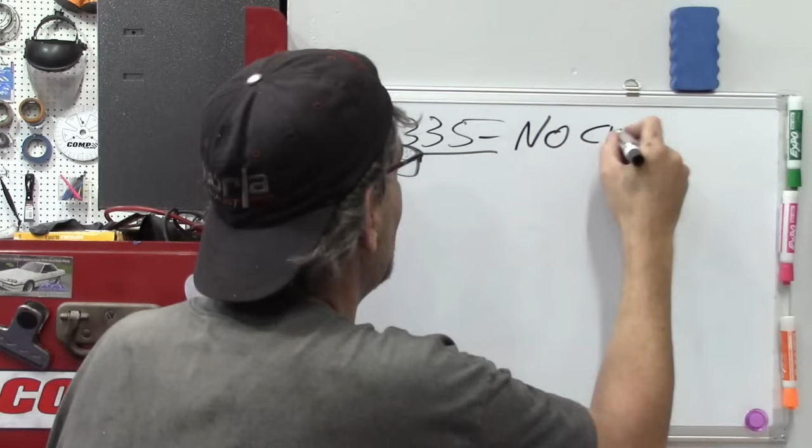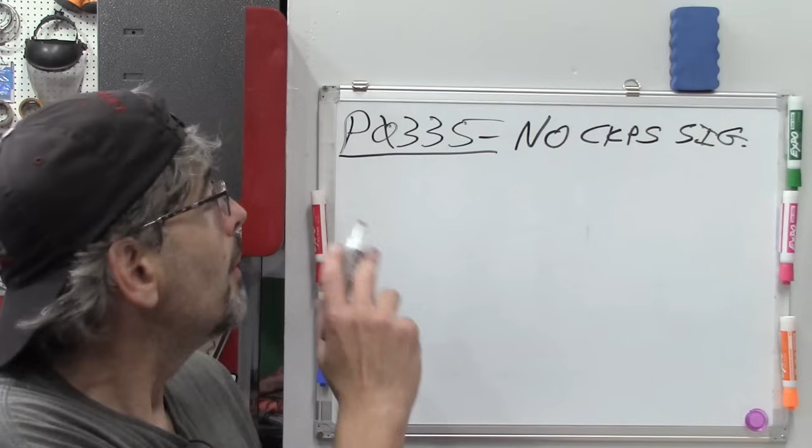All right, so the original code the guy had, which on the GM car is typically going to be a no crankshaft position sensor signal code. So essentially, for a certain period of time, and I don't remember how long that time is, it's somewhere along the lines like 3 or 5 seconds, if no crankshaft signal is detected with the engine turning, and of course it knows the engine's turning from the camshaft position sensor, but if it doesn't detect a crankshaft position signal at all for a certain amount of time, PCM will throw this P0335 code.

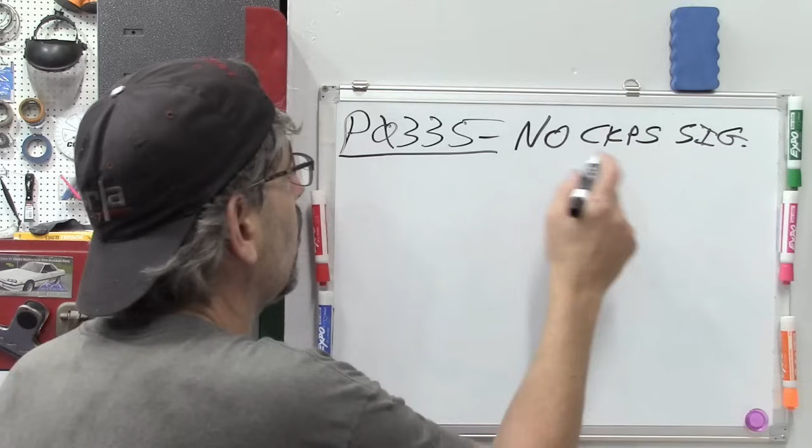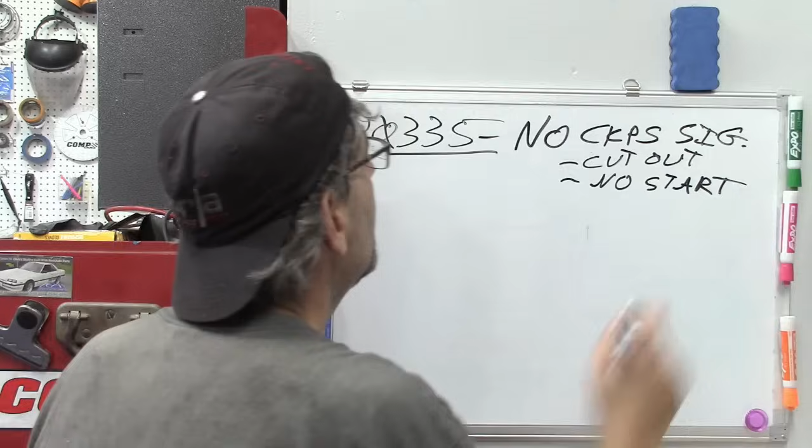Of course, upon getting that P0335 code, most people are going to just replace the crankshaft position sensor. That is what this guy did. And then after replacing the crankshaft position sensor, the vehicle no longer has the symptoms as before, which is it would cut out, it would sometimes no start, and also run pretty rough.

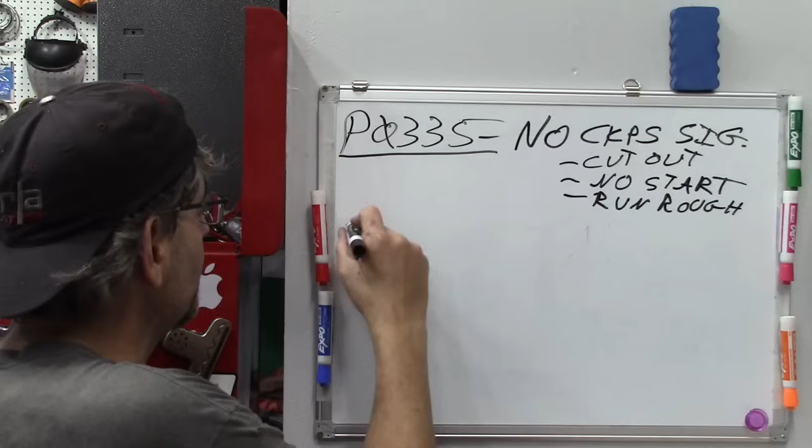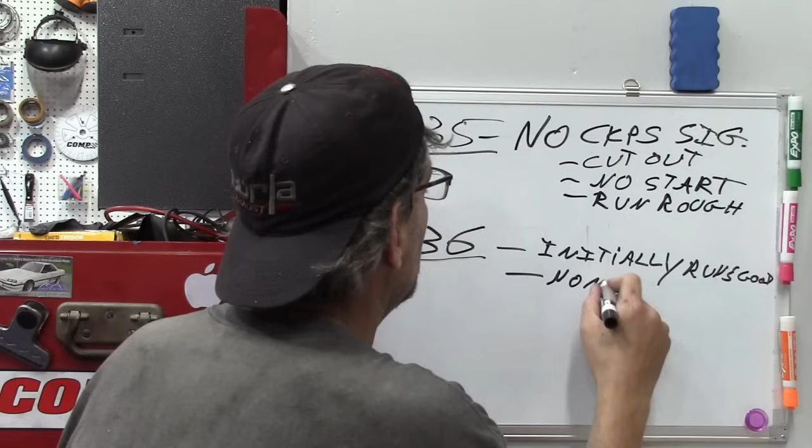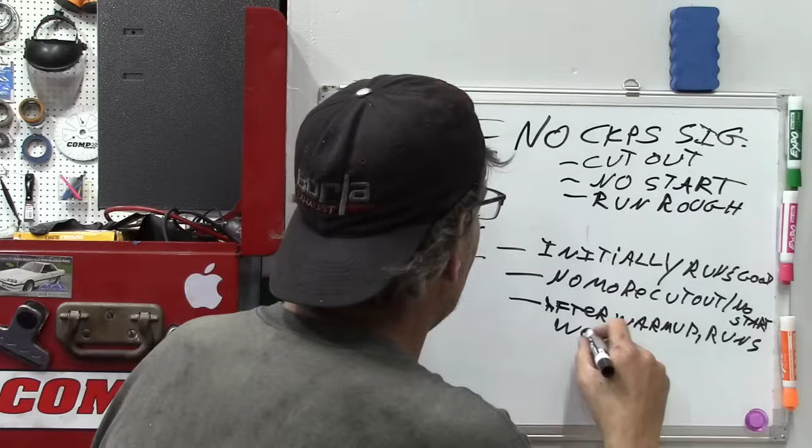So he replaces it. Now, after replacement, he develops the P0336. With this, he has a new set of symptoms. One of them is it initially runs good. Another one is no more cut out or no start. So the symptoms change a bit. It runs at least a little bit more consistently. Then the other thing is after warm-up, it runs worse than ever. So that's what we're dealing with on this.

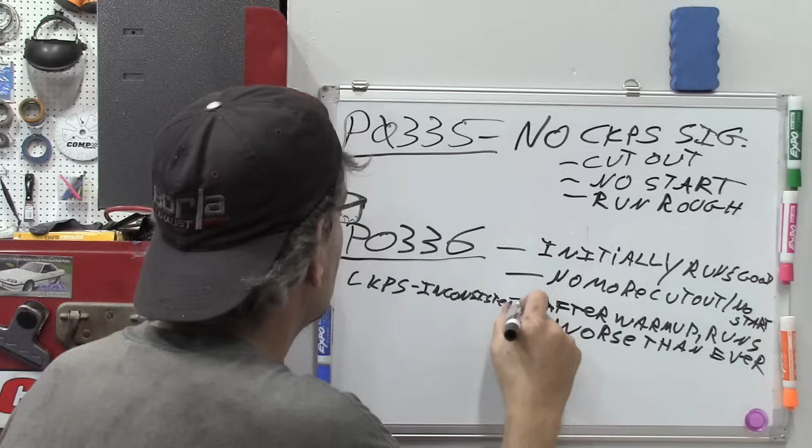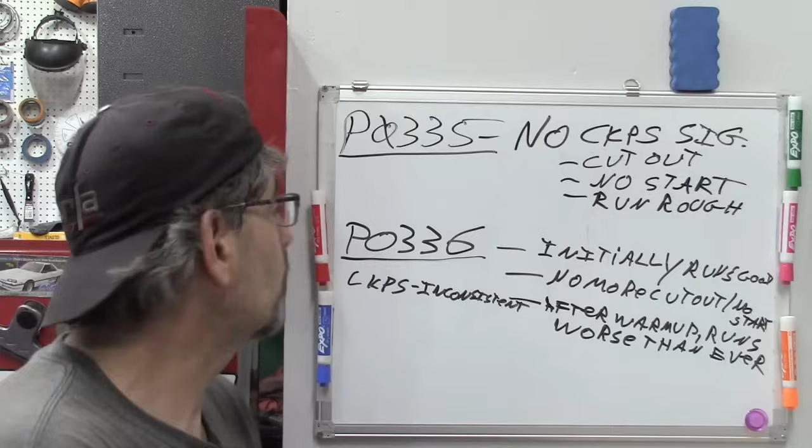Now, the P0336 code is a little bit different in that this is essentially a crankshaft position sensor inconsistent signal. So in this one, if over a certain period of time there is an in and out or intermittent signal from the crankshaft position sensor, that's where you'll get your P0336.

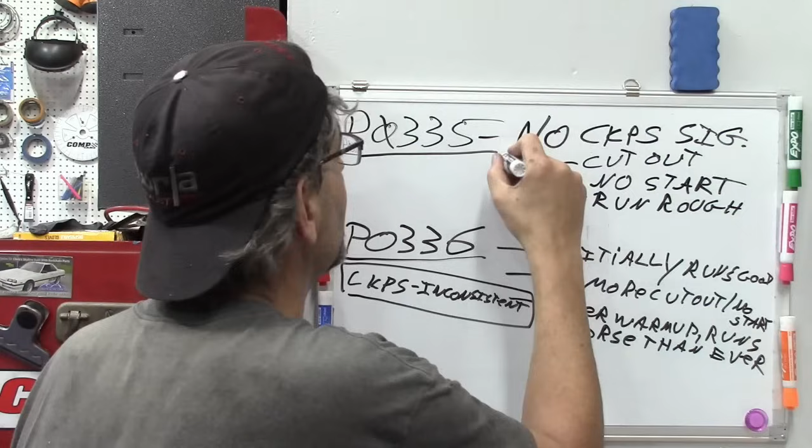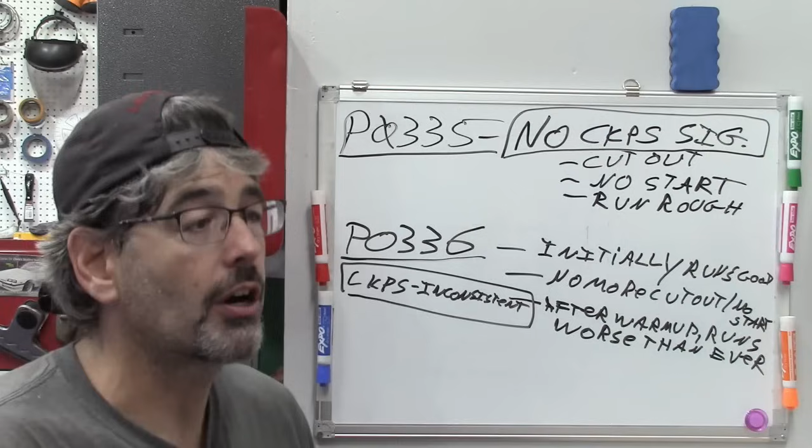So this is giving me a direction because I can put a story together which I believe is going to be the most likely explanation, and that is going to be some kind of loose wiring, loose connection, or something with the crankshaft position sensor itself, because initially he has no signal from the crankshaft position sensor, but after replacing it, he gets an intermittent or inconsistent signal, according to at least the criteria that sets this code.

And what that's telling me is most likely he probably didn't need the crankshaft sensor originally. There was some kind of wiring or short or some issue there that when he moved the wiring around, replacing the crankshaft position sensor, he created a different positioning, and now there's just an inconsistent code. Of course, I don't know this for sure. This is just the hypothesis that I'm going on, but I want to have some direction where I'm not just randomly changing parts, and I have a good idea of where I want to start.

One of the things that's a little bit annoying about this type of vehicle, and the same thing happened with my Trans Am, we have the crankshaft position sensor located behind the starter.

So I have to remove the starter to get to the crankshaft position sensor. As you know, I am not going to get under a vehicle and remove a starter from a vehicle unless I absolutely have to. The way I would do this, as you know, is I would go to the PCM and I would read the signals from the PCM.

The problem is, given this story, most likely the issue is going to be at the connection near the crankshaft position sensor itself. So I know that it is going to be a waste of time, most likely, for me to go to the PCM to read my data. I want to go directly to the area where I'm likely to visually find a problem, which is going to be at the sensor itself.

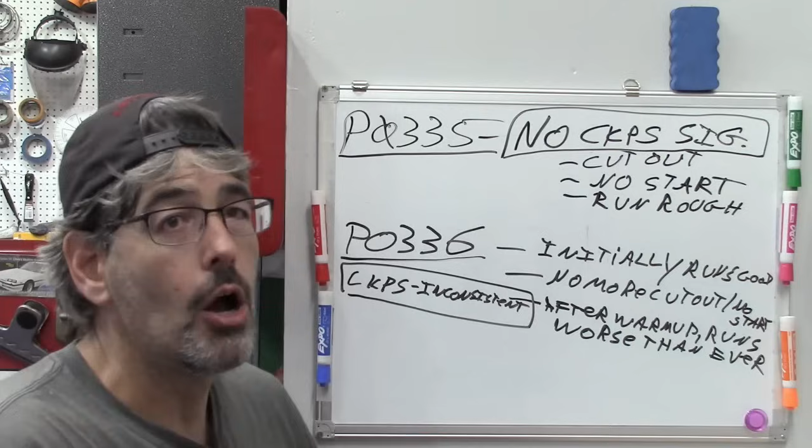It is going to be justified in this case for me to remove a starter, whereas typically that would be a really big time-consuming waste, because I have easier ways of reading the data off of that crankshaft position sensor. So I know where I'm going to go, I know what I'm looking for, and probably I'm wrong about this, but we have a direction without just firing the parts cannon. That's the idea. By the way, how well did replacing the crankshaft position sensor work anyway, for this guy? So that's the direction we're going to go.

I know Scotty's fans are all wondering, man, this guy sucks. He's been talking for 15 minutes and we haven't even moved a wrench yet. Yeah, exactly. Move a wrench on what? As a matter of fact, most likely I am going to fix this vehicle without even using a wrench at all. So that is how I do things, and that is the way we are going to do it right now.

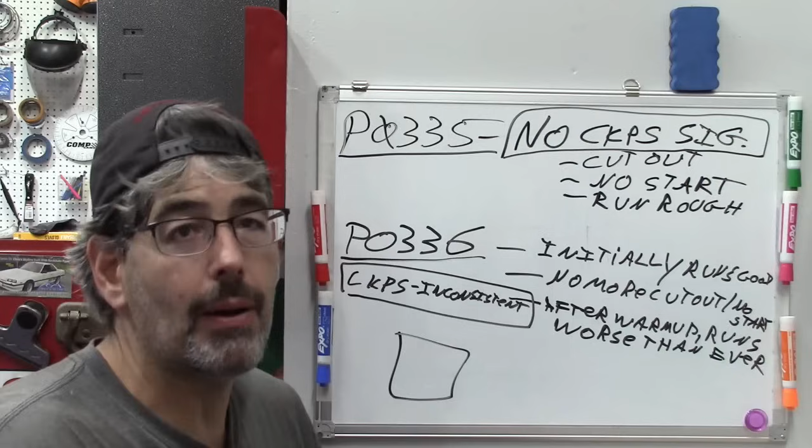Oh, one other advantage I have, and that is that I believe I'm going to be able to do this without a wiring diagram, because, as I mentioned before, we did crankshaft position sensor on my Trans Am, and while I'm not totally 100% sure of this, we do remember that the input wiring, the, what's the word I'm looking for, the reference wiring is going to be green.

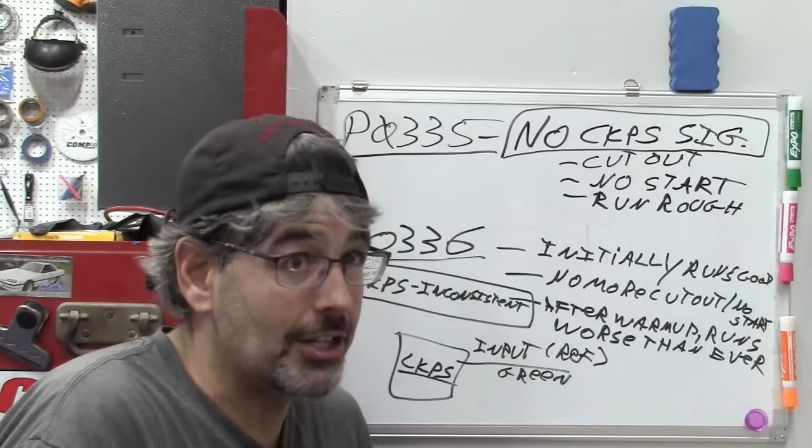We remember that from the video on the diagnosis and understanding of crankshaft and camshaft position sensors, because it really caught me off guard that the green wire, which of course you would expect would be a ground, was indeed, when we looked at the wiring diagram, the ignition positive, and we validated that also with the voltmeter. So I am very positive we're going to have the green wire. I don't remember what the other wires were. I remember there being a yellow one, I think, for the signal.

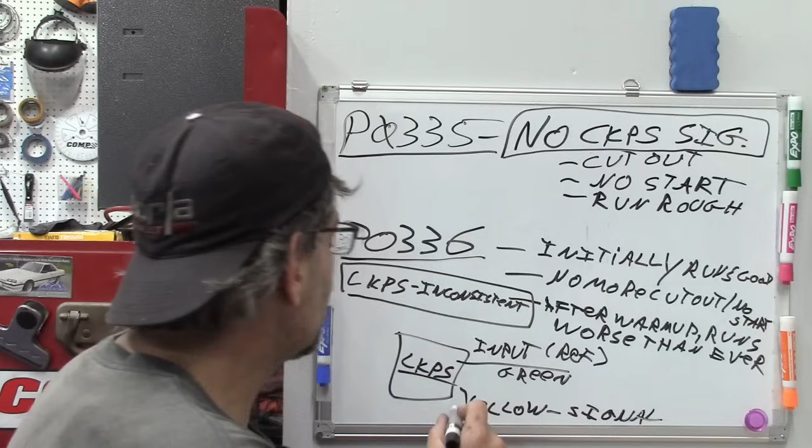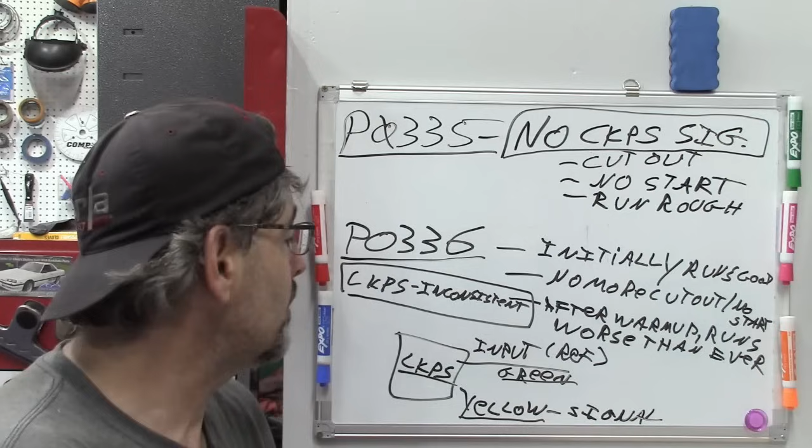So as long as I've got any two of these, then I of course know that the other one is going to be the ref low, and we'll be able to figure this out anyway. But the nice thing about this is, now that I have some background knowledge because I did my homework earlier, I won't even need to pull up a wiring diagram. Really, just knowing the green wire is going to be the reference signal is going to be more than enough for me to figure out the system. So let's get started on that.

Also wanted to show you the codes on the scan tool. A lot of times I forget to do that. All right, well actually we got a new one now. We got a random misfire code. Earlier we just got the P0336. And as I mentioned, we were trying to do the crankshaft position sensor relearn, but we're unable to do it, I believe because the codes kept popping up. It kept giving this out of range error, meaning that it was detecting something out of range with crankshaft position sensor, and it just refused to do the test.

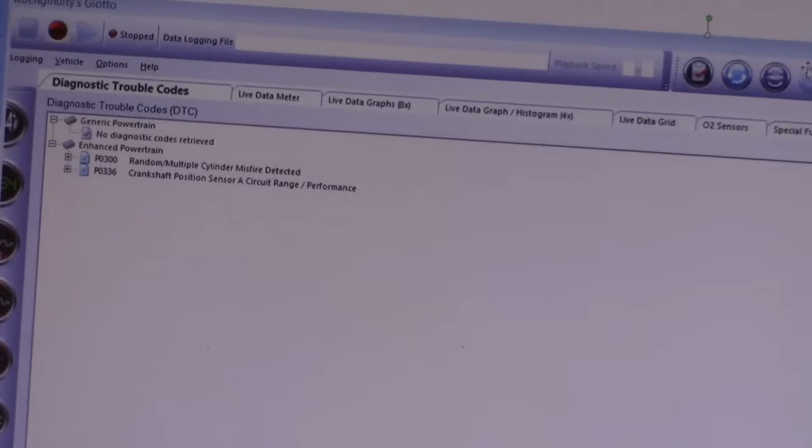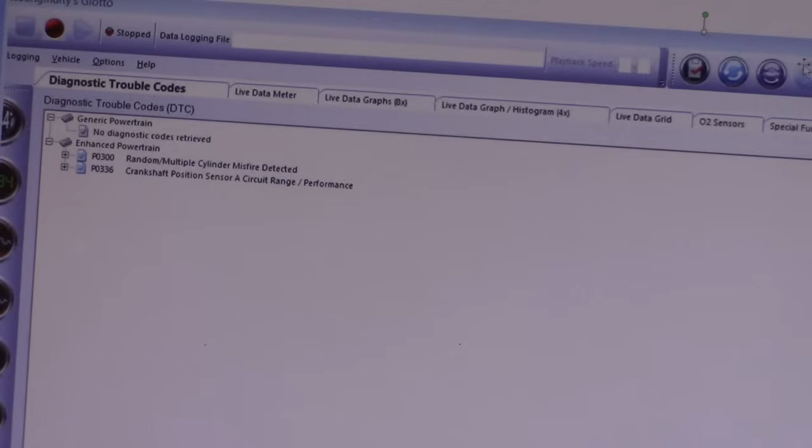Again, when we warm up the engine, we start having that phenomenon where it will start to run bad. Although it is still running good right now, but I'll get in there and rev it up for you a little bit, see if you can hear through the microphone the rough idling and hesitation. But also the fact with it warming up, that would also be another variable typically, and that is we're thinking, well, wait a minute, it runs really good when it's cold, but then once it warms up, it runs bad. Is that a closed loop phenomenon, or is that a temperature phenomenon?

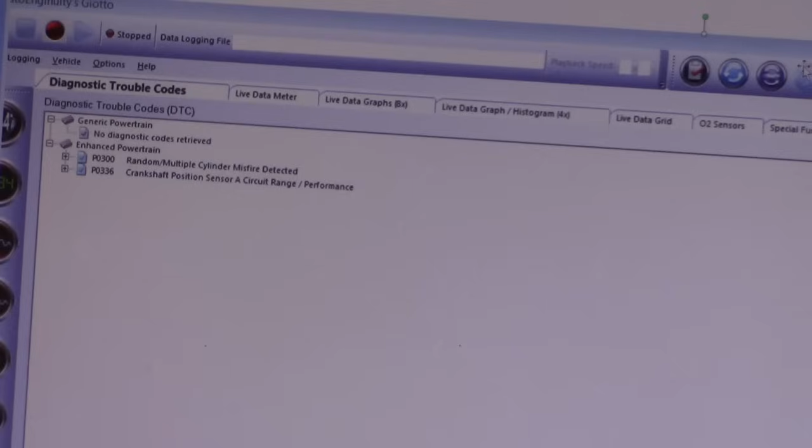And again, that's where that P0336 code originally comes in, because we've never pulled that code up yet. And that is telling me that there is variability. What are the variables for intermittent problems? Temperature is one of them, along with vibration and moisture and load and accessories, things like that. But I believe this is going to be more of a temperature phenomenon than a closed loop.

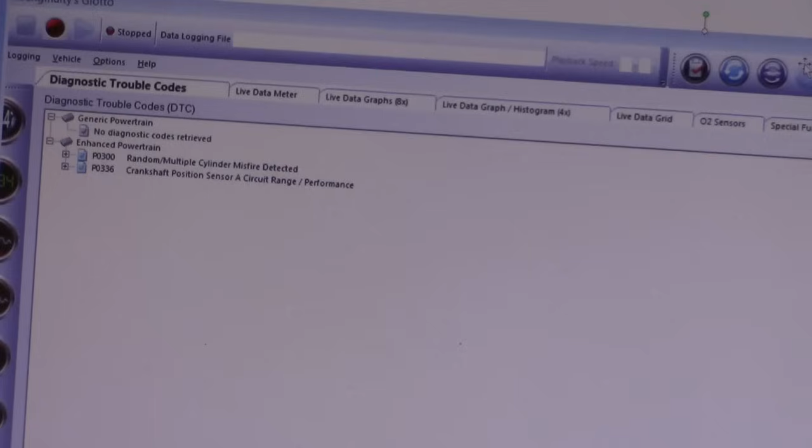Had we not seen the P0335 before the change of the sensor, that would have taken me in a totally different direction, and I would have had to start from square one. But this is telling me that this is going to be an inconsistent wiring connection issue or something. So I hope you see why that's important. You guys who followed the last series along know where I'm probably going with this.

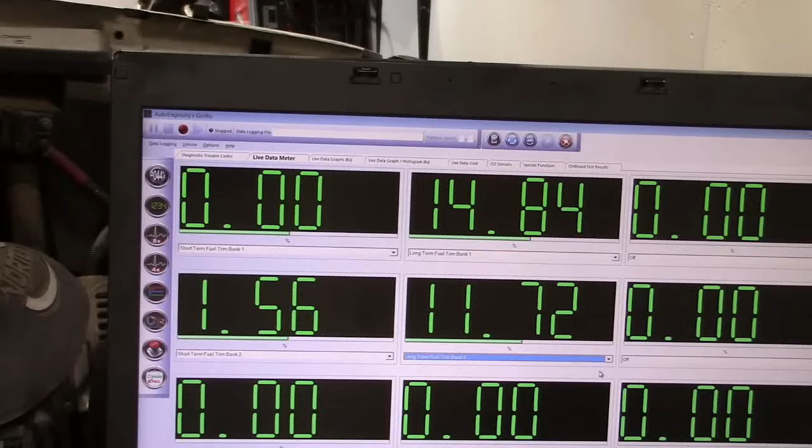I'm going to pull up some fuel trims here. And that truck I was working on last time, that Ford, that would not respond to anything on long-term fuel trim. I come to find out the truck's name is Big Red from the owner. Reported now a little bit high. Would like to see how that responds with throttle, but as you can see, I am able to read them, and this is drive-by-wire here, so I want to create some kind of variable to change the fuel trim. The only reason I'm doing this is because this is a little different than what I initially saw.

As we can see, the engine is warmed up. Engine is still running really good. Actually, now it's starting to run rough. Yeah, now we got it. It's starting to run rough. I was actually going to try the crankshaft position sensor learn because it was running so good. Let me get engine speed up here. Yeah, it's definitely running bad when I hit the gas now. It's idling good, but...

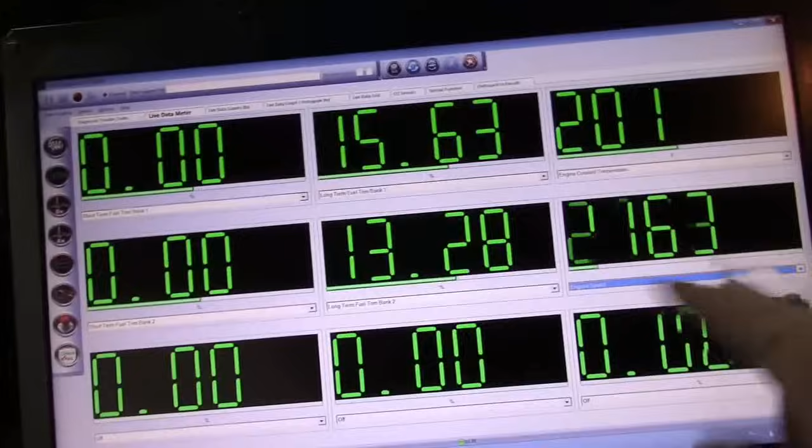And holding the throttle still, you can see how jumpy... Whoa, we lost RPM there for a second. Totally lost it. Yeah, we're definitely on the right track here. Oh, it just backfired now. So, because it was running so good, I was going to see if it would do the relearn, but we need to fix this vehicle first before we do it. It will not do the relearn when it's jumping.

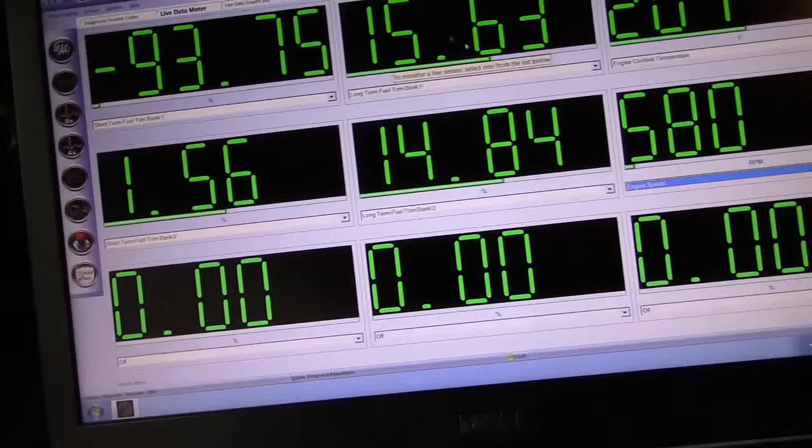Look at that right there. 9,400 RPM. It wouldn't even go that high. And we're still at idle. I didn't even touch the throttle. There is definitely some inconsistency here. So we are absolutely on the right track. All right, let's clear out of that and let's get under the truck.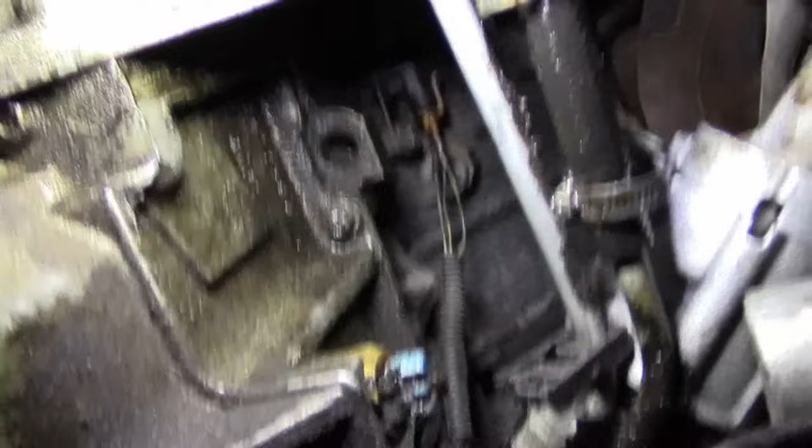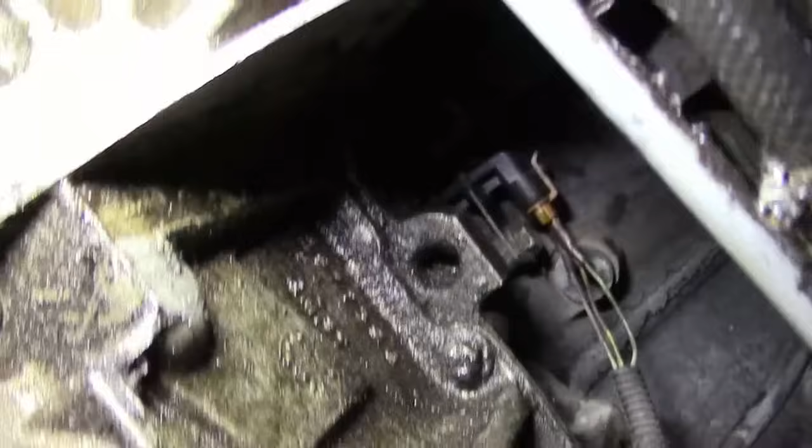You guys know I love these under-car shots. I am not even sure how to position the camera here. I want to have it stable so I don't make you guys seasick. You can see we've got another couple of variables here. This vehicle has a pretty significant oil leak, and that could be a variable if that is dripping onto the sensor. We can see it is not. But another reason that I am down here, I forgot to mention earlier, is another variable would be the reluctor wheel having some kind of an issue. If we've got loose or missing teeth on a reluctor wheel, or an air gap issue between the sensor magnet and the reluctor wheel, some kind of debris.

So basically, putting everything together, there's like a 95% chance that the issue is going to be in the field of view of this camera. Your only other variables are going to be something along this wiring harness, which is a possibility. We have another video where one ran along an exhaust manifold and melted. That was just a few years ago. And the other possibility would be a PCM issue. So those are the only two variables that wouldn't be in this field of view. And based on the story we're putting together and the evidence we have, it is just overwhelming. It's going to be around here. So let me try to reposition the camera.

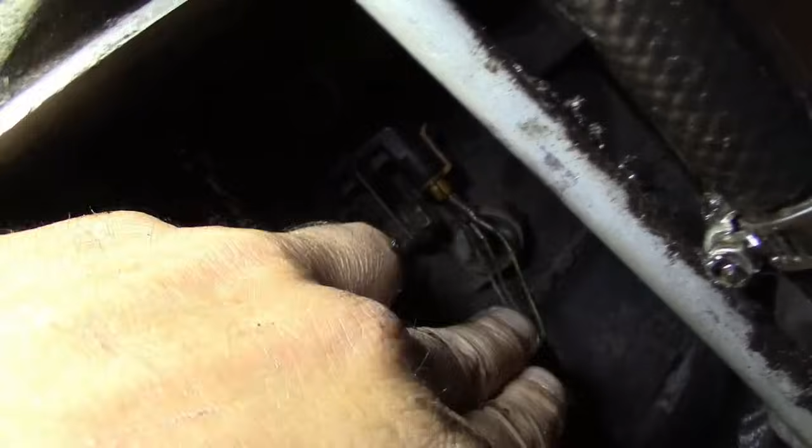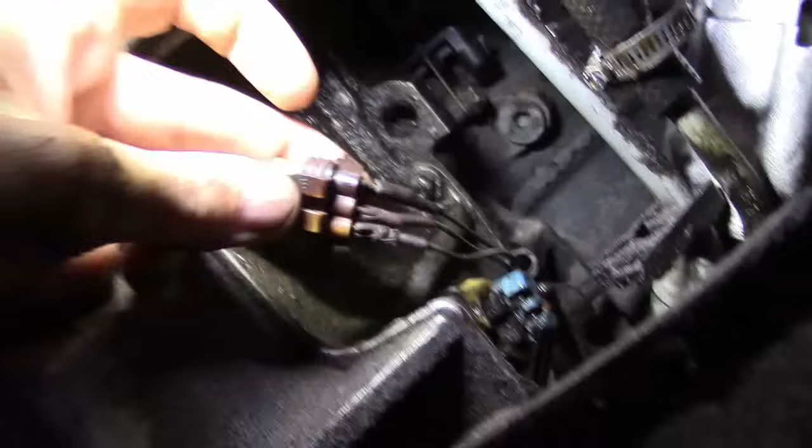But here's one thing. That right there is a green wire. So that I know is going to be my reference. And what I want to do is get some back probes in there. And actually, before that, let's just inspect this, because it looks like this wiring has been adjusted, because these heat shrink seals definitely look aftermarket to me. So it does look like there may be something there to look at. Let's actually just take a look there. Oh, well, there you go, right there. See this?

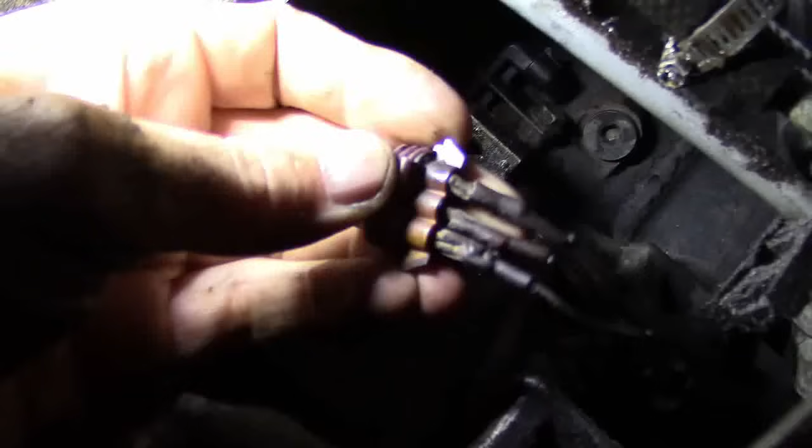This wire here, we've got a green, a yellow, and this wire, I'm not even sure what color this is. But I'm guessing that's going to be the ref low. And that wire is wiggling in and out of its socket. Yeah, that definitely is. The other ones are pretty stable. But that's going to be our issue right there. So how easy was that? Now, of course, I want to confirm this and be able to reproduce this. So the first thing I need to do is get this camera still.

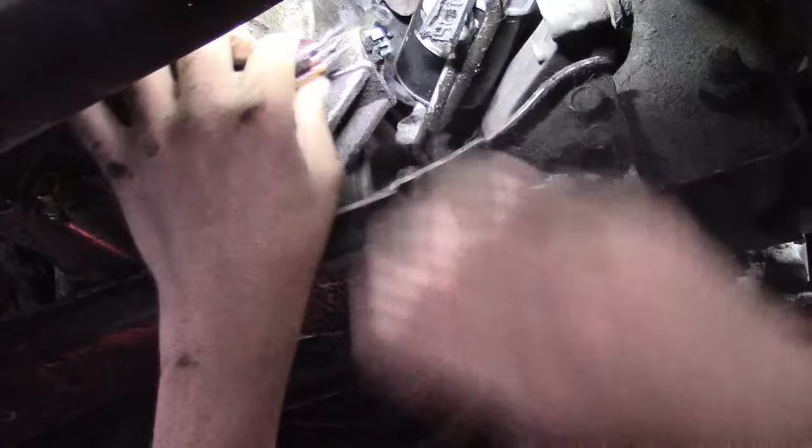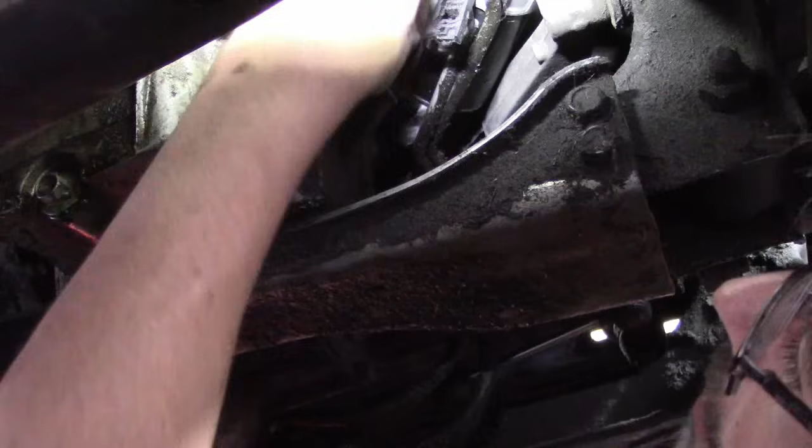All right, I will try to be conscientious of your view here, but that definitely is our issue. I want to be 100% sure, because I don't want to get back under this vehicle, and I want to confirm these wire connections. Hey, look, there's an oil sensor wire that's kind of stripped here too. Yeah, there's definitely some shoddy wiring here for sure, but our issue is going to be here.

What I want to do is identify these wires. So let me get the ignition on real quick. All right, so now I've got to figure out how to get my voltmeter in here. Let's see here. And that's not going to work. All right, well, while I like to have the quantitative values from the voltmeter, given our situation here, we are just going to use a test light. I'd really rather have the voltmeter, but I just can't get it in view right here.

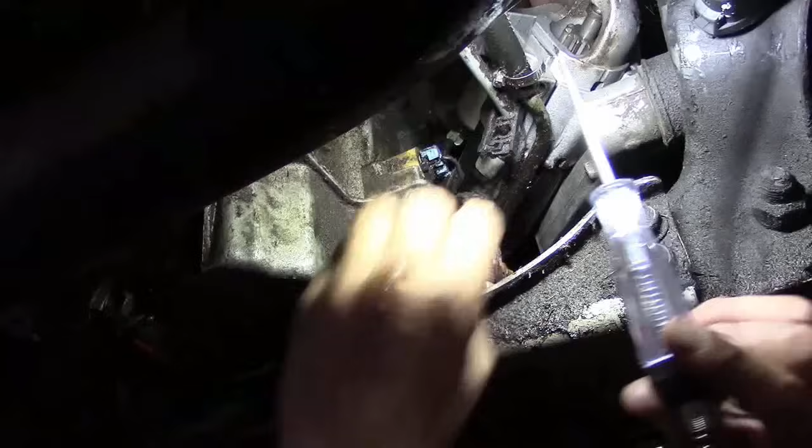So I want to identify my wires, and my green I know is going to be my reference. And we got it right there. I believe I'm on a bad ground there, or it's a 5 volt, but I don't really care. So I know that that's going to be my reference there.

Now, I want to get a jumper wire and just verify that the signal works. So I'm going to basically jump. This is called a crank sensor bypass, and I'm basically going to just put a signal in there. I need a jumper wire for this, and I cannot find one here. I thought I brought one. All right, well, we may be able to just do this with the test light. Actually, here's a jumper wire.

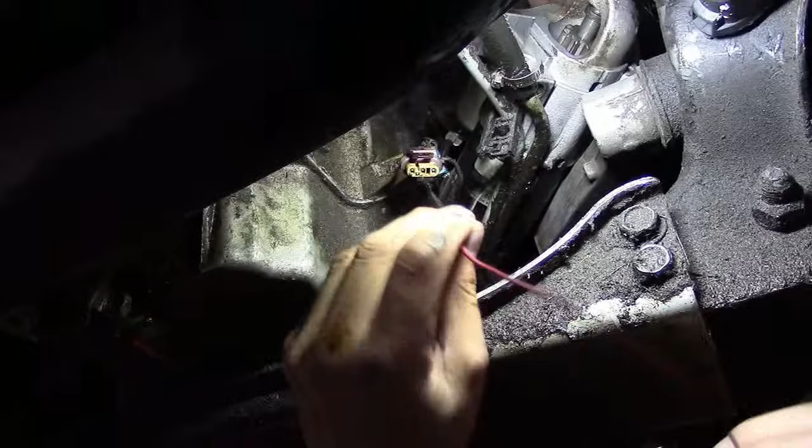"Oh no, you're going to blow your PCM doing this." Oh, really? Why is that exactly? Why am I going to blow my PCM? Because I am doing exactly what this crankshaft position sensor up here does anyway. So why am I going to blow my PCM? Please tell me. I get that comment all the time from people who have no idea what they're talking about.

All right, so the only thing, though, is I'm not totally sure this is a signal wire, but I am confident enough. So I'm going to do a crank sensor bypass, and I'm going to listen for the fuel pump to operate and also for any spark to occur. Yeah, there it is. You hear it?

Okay, the right way for me to really 100% confirm this would be to use a scope. And the trick with this would be to do 2 channels. I would have my power and I would have my signal, and then I would use the sensor ground. This is a mistake that people, even if they know what they're doing, might make. You want to use the sensor ground on this. The reason is it will allow me to see where my loss of signal is when I see it lost on the scope.

I would see the loss of the signal, but I would retain the power on my other channel, and that would tell me that it is a loss of signal. That is a signal generation issue as opposed to a wiring issue with the power or the ground. And that's the trick. In that case, the only explanation would be the crank sensor itself, and I would replace the crank sensor seeing that. But there is no need for me to do the scope here.

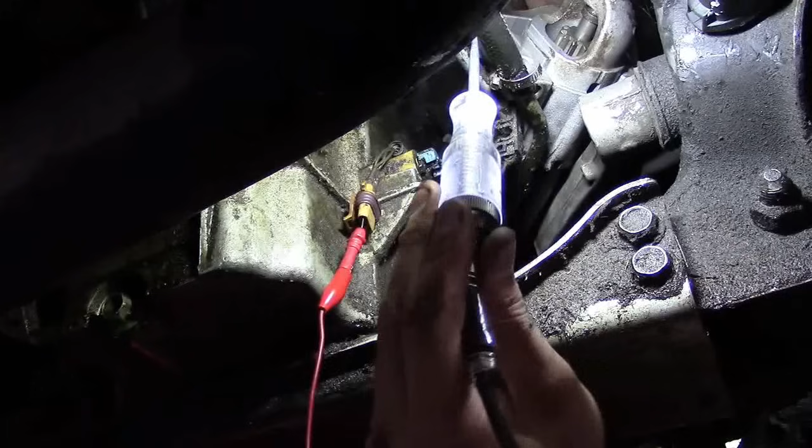What I'm going to be able to do is just replicate this probably using the test light. I think that'll be the easier way of doing it. But I need to put together a system here. All right, I want to attach my test light to that and verify that I've got it. There it is. That's pretty weak. You know, that power signal may only be 5 volts. I don't really care. That's not what my issue is.

Now I'm going to move this to the ground. And of course, we get our light on. Then I'm going to wiggle this wiring around, and I'm not able to lose that test light. All right? So that's showing me that that's not going to be an issue. But it's actually the signal wire here which is my concern.

And I'm going to, again, touch it there. Because we're going to have activity there, I don't anticipate the test light to light. But we're going to listen for the fuel pump. And it does activate. So now I'm going to pull this wire back a little bit because it's about ready to come right out of this connector.

And, oh, did you see? There was a delay in the activity there. So it's clearly very inconsistent. Let me wiggle this wire connector around a little bit more. All right, so now I can touch the terminal right there, and we don't get the pump to activate. Now let me push the wire in just a little bit. Did you hear it?

Now it works. And we did get it to a position before. Try that again. Right there. Where it doesn't work. Wiggle the wire around. There it goes. Okay, so I can show that I have inconsistency at this connector. That is it. We are done. That explains the problem. So what I'm going to do is repin this connector, and then we will put it back in, and this car should run perfectly fine after that.

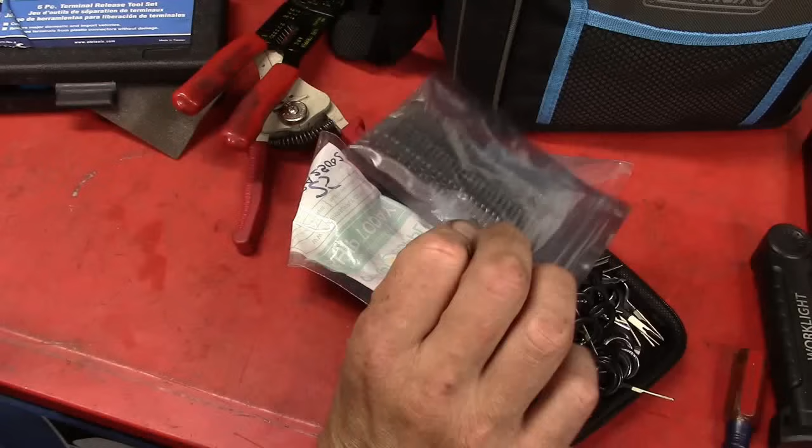This terminal repair kit here that I'm using, there's actually two different ones. This one generally helps to remove most terminals, OTC 4461. And this is like a really complete kit for removing and installing new terminals. Comes with a whole bunch of extra terminals and everything. And that I got from Amazon, and quite honestly, I don't even know what it is. There's no markings on this thing or anything. It came in this little case, but man, it's definitely pretty comprehensive.

But anyway, pretty self-explanatory on fixing these terminals. You just crimp on the new ones and pop them into the connector after you just yank the old ones out. Use these little keys here to slip them between the terminal and the connector, and you can just slip the terminals right out. But I am sick of filming from under the car, so I'm just going to fix this car, and we are going to see the final result.

All right, we are back in the truck now after I've reinstalled the starter and fixed that wiring. So one of the things we're noticing, we're at warm-up, and we do have smooth idle. But we had that before. The difference now, I forgot to show the tach earlier. We saw on the scan tool tach that it was jumping all over the place. That was also happening with the dashboard tach over here. We can see we're now as smooth as can be. So definitely we've got this problem fixed.

And as a matter of fact, we can go ahead and do our original task, which was to head over here and do the crankshaft relearn. So let me go ahead and get this set up real quick. Okay, the first thing we want to do is clear any codes. So let's get that done. And let's go ahead and check to make sure they're cleared now. And we can see that the codes are cleared. This is AutoEnginuity here, my favorite go-to scan tool. We're going to go to the crankshaft position variation learn.

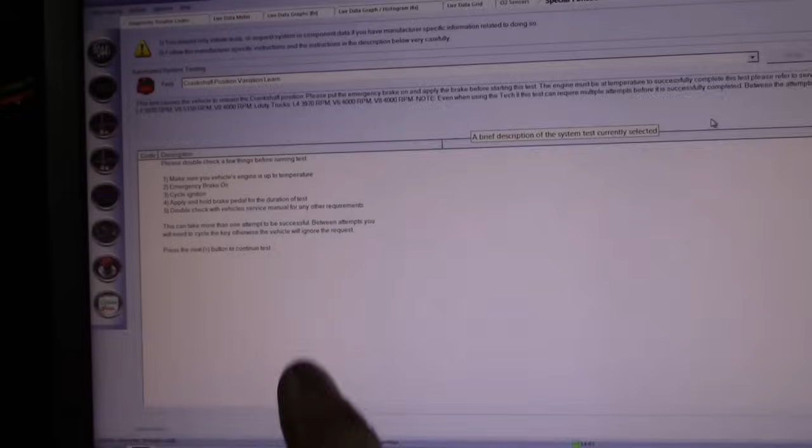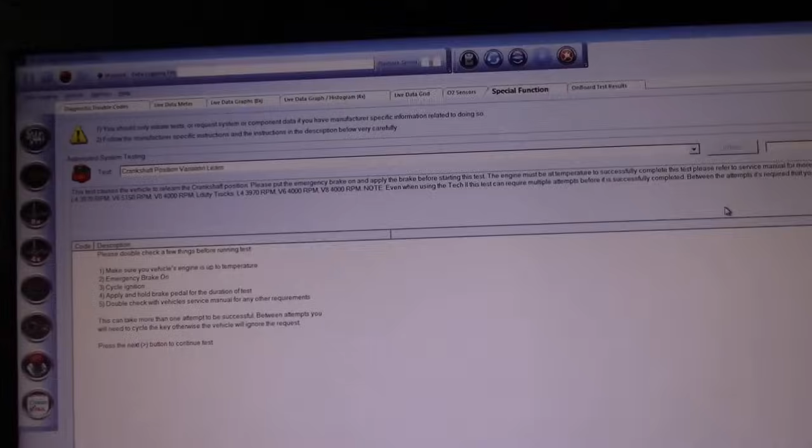All right, the instructions tell you to put the emergency brake on. Basically, you're going to get this thing to wide open throttle, and they don't want any chance that you drive the car through the garage or something like that. So let me get the emergency brake on. Got my foot on the brake pedal. And then what we're going to do is bring it up to wide open throttle, basically to the fuel cutoff. And then as soon as the fuel cutoff occurs, I'm going to let off on the throttle. So we're going to go over here to activate, and it should be waiting.

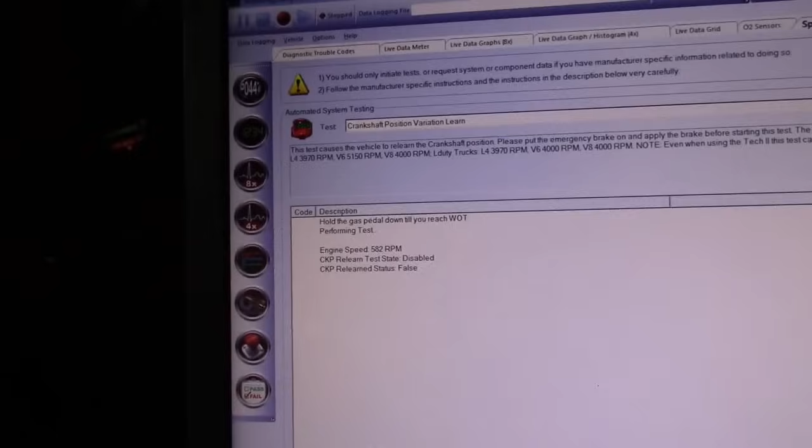Okay, we have the fuel cutoff occur there. And you sometimes have to do this a couple of times, but notice how much smoother it is now. It's not all choppy and everything. And there it goes. Just took twice. Test completed. And that's it. This car is fixed.